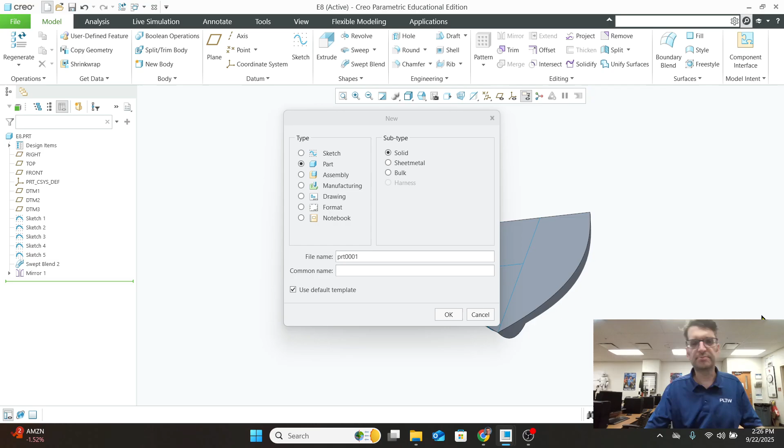There are quite a few exercises still between us and the finish line. Today we're going to get some practice with projected curves and some further practice with sweeping, so we can make something pretty interesting when it comes down to it.

And let's see here, that is... I don't even have it open yet, which is really bad. God. Let's try that again. Let me open it up.

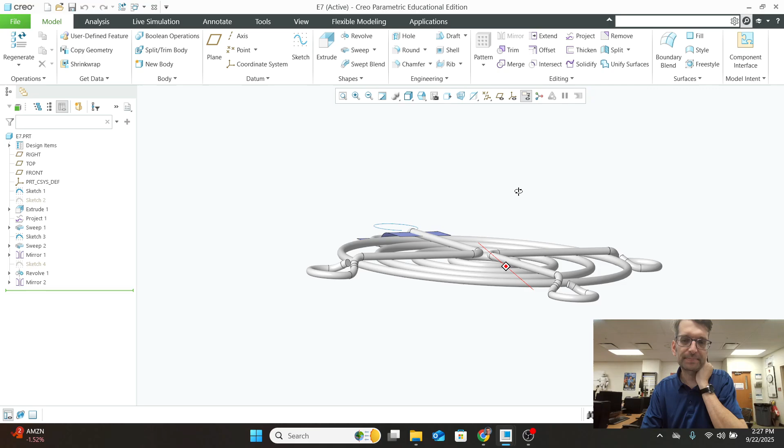This is what we are after today. So we need to make this fan grate so somebody doesn't stick their fingers into a cooling fan on the back of a PC power supply. You see this style on older power supplies, older pieces of electronic equipment.

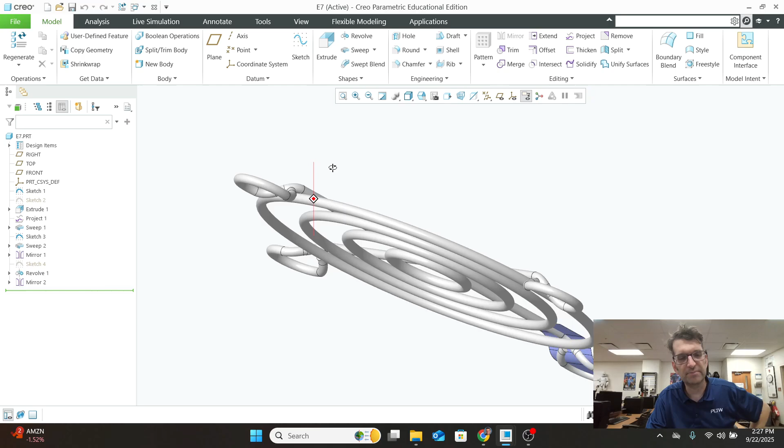But you still see some of these around. And the thing that makes it interesting, and a little bit tougher, is not because it's a sweep thing - we've done sweeps before - but we are sweeping and projecting a sweep onto a curve. So we see that the edge of this part actually has curvature to it, because this would be where a screw would pass through each of these 4 holes, and we would mount this thing to the case of a computer tower or another piece of electronic equipment. So some curvature there makes it a little bit more interesting.

And we're going to try, and the hope is that we can create this thing with a minimal amount of mess over here in our model history. So we're going to create a couple parts of this. We're going to use the mirror tool to make our life a little bit easier and hopefully get through things a little bit quicker.

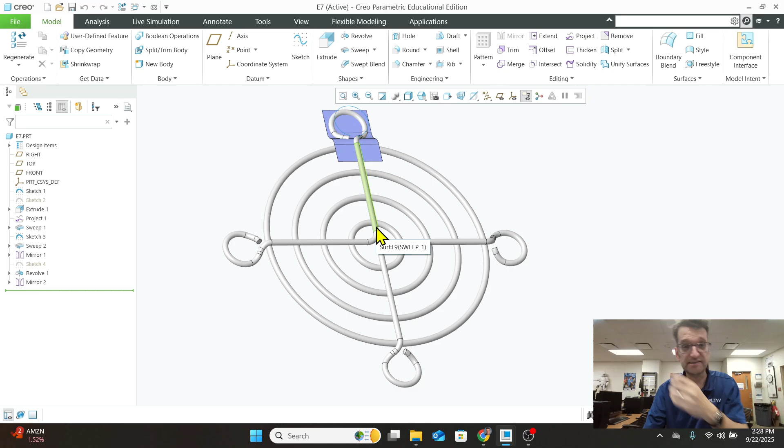All right, so first things first, we need to go ahead and start a new part file. I'm going to call this one Exercise 7, because that's what it is. I'm going to hit OK. Nope, I left a space in there - Creo doesn't like those spaces.

And here we go. So turning into your copy of the text available on vertanux1.com, and turning to page 72, we find exercise number 7. We find the somewhat older version of these instructions, because this is from a previous version of Creo.

But I think there is enough here for you to be able to get the thing done. So try, after watching this, go and try and do the thing directly from the book, using the steps shown in the book and what you've seen in the video here, to try and work through the process yourself, rather than just listening to me for 15 seconds, pausing the video, completing a step, pushing play, hearing the next thing, and repeating that until you get it done. I think you'll get a lot more out of it if you go ahead and do it that way.

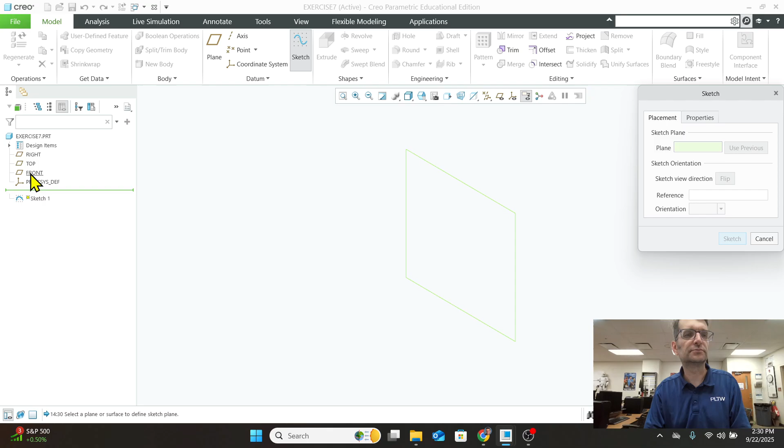All right, so we're going to start off with a sketch on the front plane. We're going to hit sketch, and I do have my planes turned off - there they are again. Let's go ahead and go to that front side view so we can see that. And we need to start drawing up this little - let me pull this up so we have this too, because we really need to have that up, that would be helpful, right?

Let's go to - and remember too, in case you have forgotten or aren't terribly sure that this exists, if you go to Vertanux1, you will also find all of Chris Sikora's videos on doing these things. And again, his are a little bit more direct. Chris is an old pro when it comes to Creo, definitely, and he'll get you there the most direct, quickest way. I'll take some side steps, go through a little bit more explanation on some stuff and how to get yourself out of trouble when you get yourself into it as a fairly new user.

And that's how I kind of approach things. So you have a point and a counterpoint on how to work through all of these things. But nonetheless, looking at here - oh, his description for things. And we'll go and find the link to his website, Vertanux1.com. I'm going to go here and grab that manual.

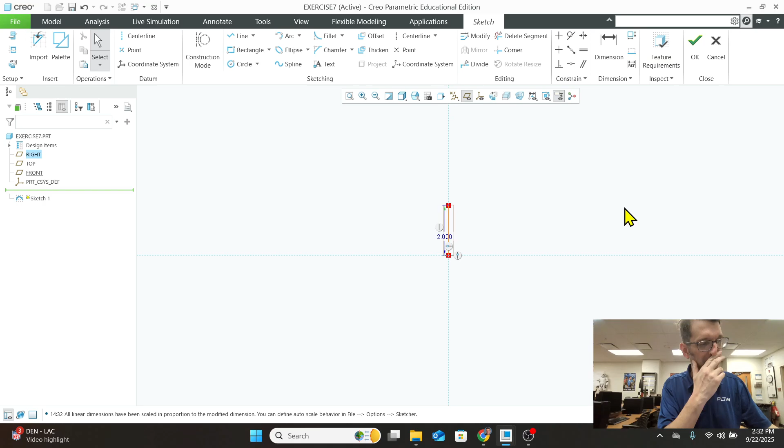So we need to add to this guy. We need to go ahead and add an arc, and we're going to do a center and ends arc. First thing we're going to do is add the center.

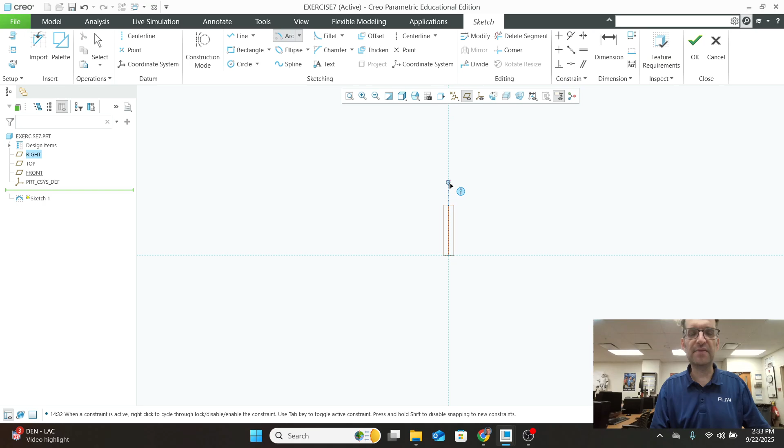We're going to put the arc out to here, touch the top of that line, left click on it once, and then work around the circle until we get something that looks about as complete as the one in the example does. Let's turn these planes off because they're just obnoxious at this point.

All right, so let's go ahead and get these things dimensioned. We need a dimension for the radius. The radius on this one needs to be 0.5 inch, a half radius.

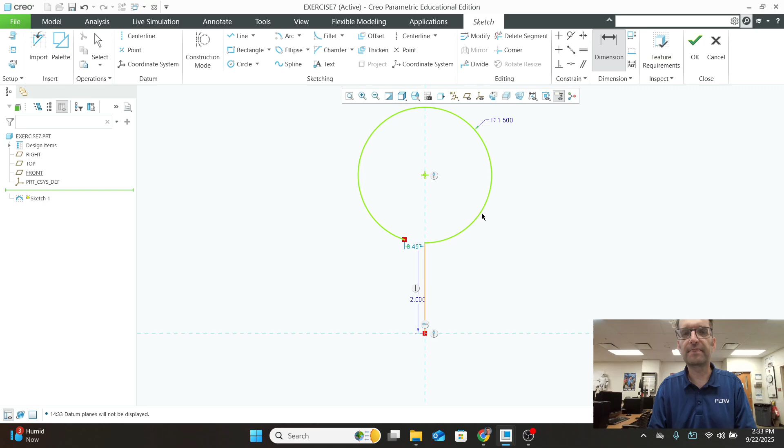Let's go ahead and set this overall height here as 4 inches from top to bottom. Let's add another dimension in for that, from there to there. I've clicked out on the side. We want to get rid of one of these dimensions because it's a conflict.

We're going to get rid of that one because it's in there as a strong one, since we set it. So we're going to delete that one out of there so that we can put one in here at 4 inches. Get that set up.

Now we need to set up and finalize this angle. Okay, so this angle from vertical is going to be 15 degrees, 15 degrees of opening from the center here to right there. Let's go ahead and get that in there.

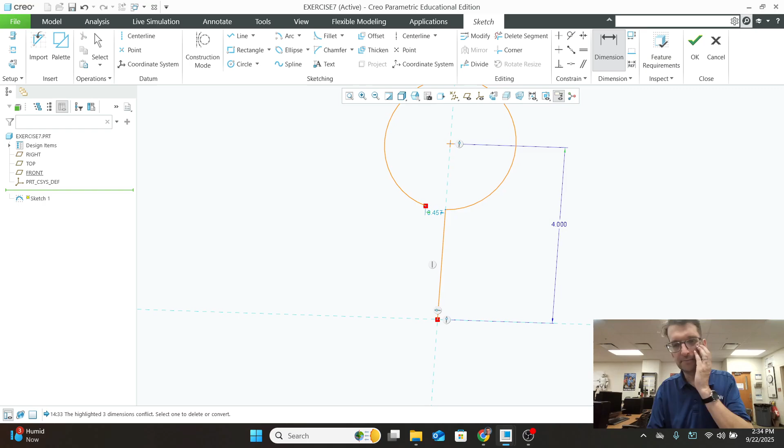I get my front view nice and squared back up again. Let's go ahead and add a center line from the center of our circle to the edge right there, and that's going to be our guide from which we can actually set up a dimension now. It pops in a dimension for us there once we do that.

Let's go ahead and override that to 15 degrees. And we need to add a radius here of 1 inch, so we're going to put a fillet

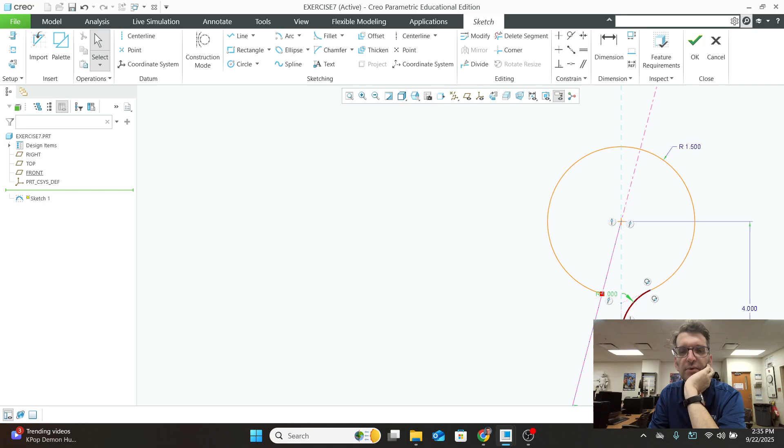from right here to right here, and that is going to be 1 inch. Set that to 1, and I think that should be what we need for that is set. All right, let's go ahead and hit OK on that one to lock that one in.

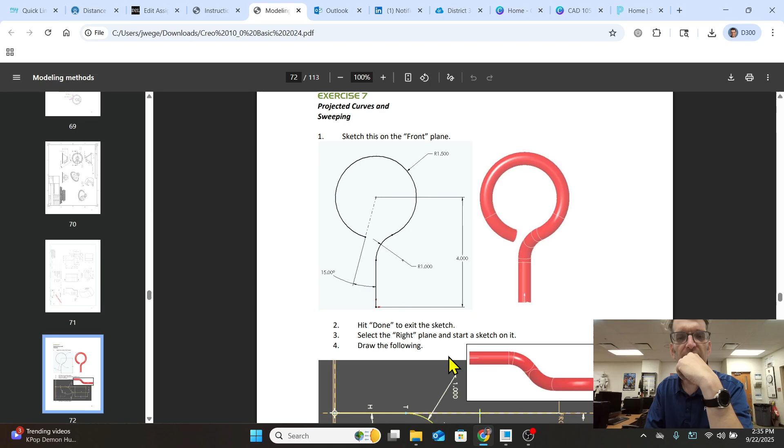And now what we're going to do is we're going to flip and go to the side of this, so we're going to go to the right side of it, to the right plane and start a sketch there. And from where this thing originates, which is right at the bottom of this line here, right down there,

we're going to start this sketch on the right side. So here is our original sketch running like this vertically. This is rotated 90 degrees, of course, so standing up, we're going to start that in the same place, and we're going to sketch how we're going to curve this thing.

So we're going to end up creating a sweep that's going to sweep along a path, which is this path here, but then we're going to put that path along this curve here. Okay, so we're kind of doing two things in one. We need two things to set this up.

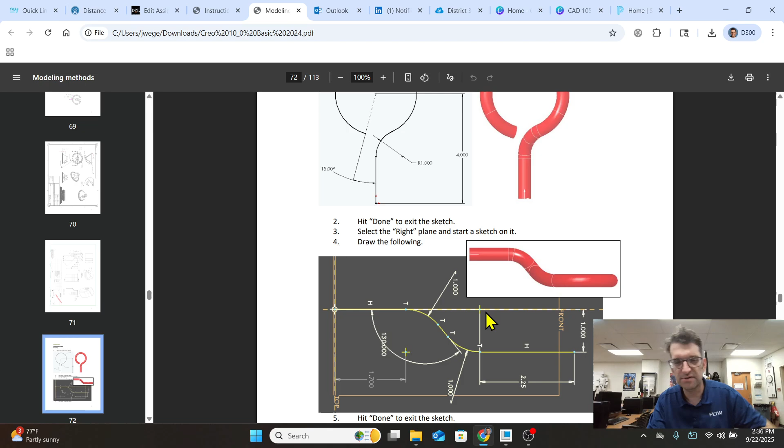Well, let's get on that second one. All right, so flip our side to the right, and we're going to start a new sketch there.

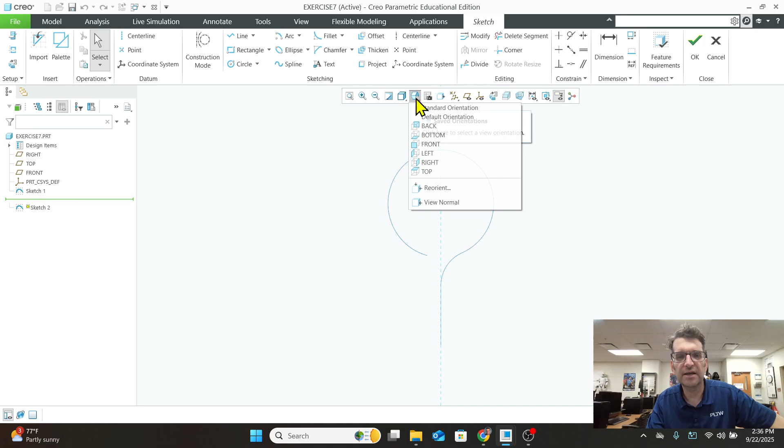Let's go over to that right side because it would be helpful to be looking at it if we're going to be sketching there, right? There we go. So we've started a sketch, it's on the right plane. We're going to go ahead and start with our line tool so that we can draw up what is shown on that right side. So let's just get it close, we're not trying to get this exact.

Remember, we're just getting it in the neighborhood, and then we're going to come back and put our dimensions in there to get things locked in.

So starting at that same origin, I'm going to come up like this. I'm not going to click on these locking points where these yellows are. I'm going to try and stay away from those things as I do this. I'm going to give myself a little bit up, and come over here like this, then go over like this, and go up something like that.

Close, but it doesn't need to be perfect yet. All right, so let's get some dimensions in here. First thing, this angle right here, according to our drawing, is 130 degrees.

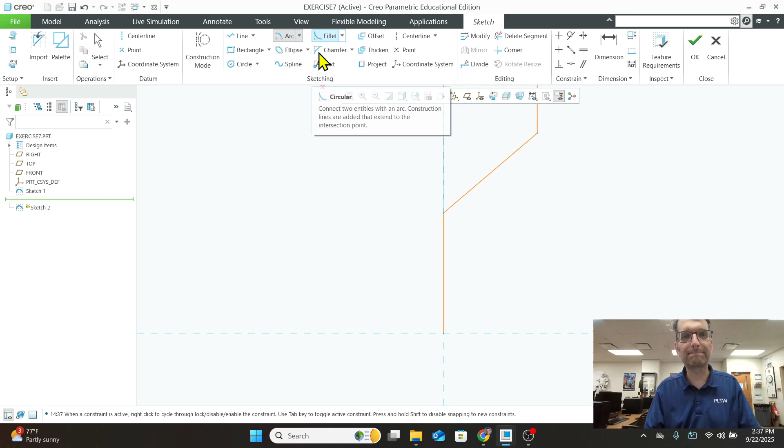We have a couple of radii on the corner here, some fillets. Let's go ahead and get those fillets. Let's set this first one here. Radius is set at 1 on there. Set that at 1. Let's add another one right here.

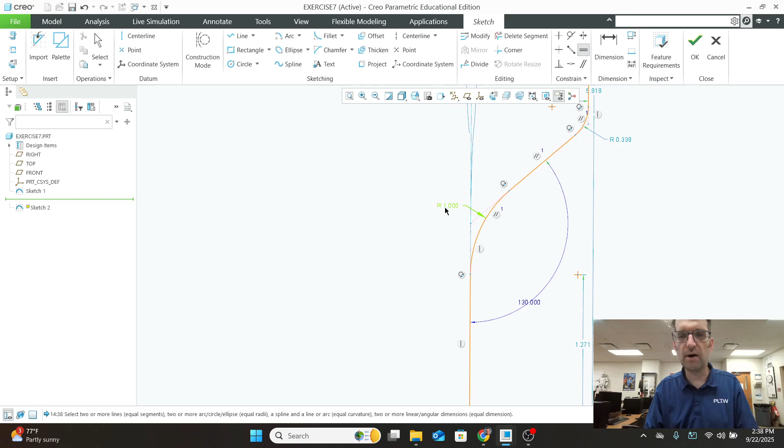So back into that fillet tool, and then we click here, we click here, and we have that radius set at 0.339, but let's be tricky here. Let's hit the equals constraint, and then we click the one that we want it to be equal to, which is 1 inch. So now those two are locked together with this single dimension of 1 inch.

All right, next we have this distance from this line to there, which is set at 1 inch, which I accidentally just hit as an equals there, which kind of works, but let's go ahead and delete that dimension. So now we got it in as 1 inch there.

That is good. Let's look at it the way that we want to look at it so it makes a little bit more sense, and look at it from the right side so that we can see that. And we need to set the overall height in 2 places here, or 3 places.

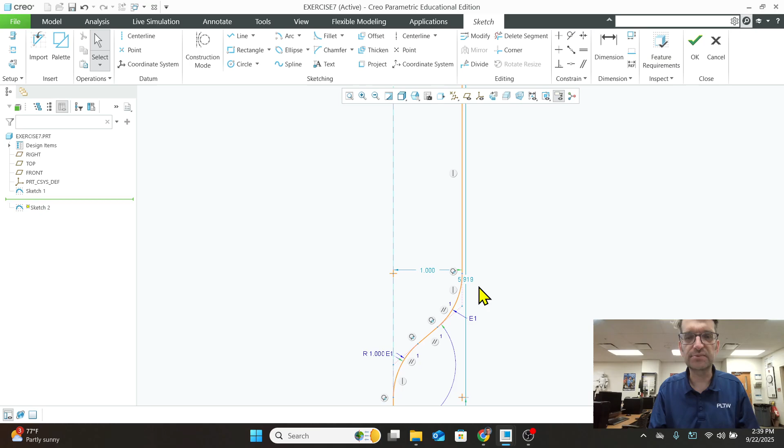Let's set the first one. So we need to put a dimension in from the top here to this point here where that curve ends. And that's going to be 2 1/4 inches tall.

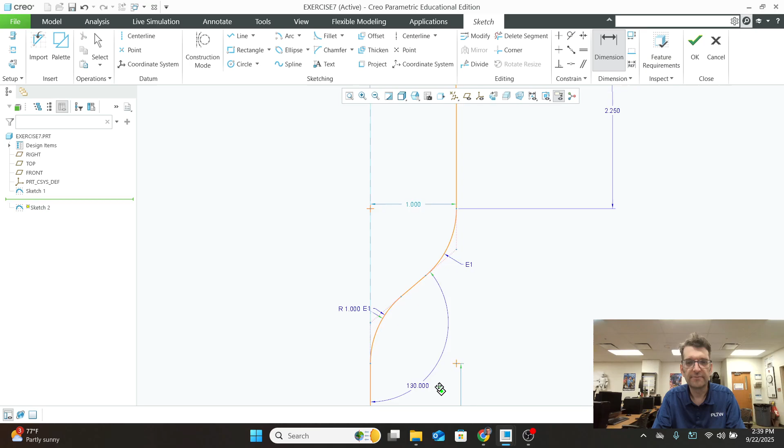We need to set another one, our other height here, which is going to be from the center of this arc, so the center point of that arc to the bottom, so is 1.7. So we have a dimension there for that already. Let's get that one in there. And now we have that set.

We have our 130 degrees. We have a radius of 1 there and there, distance of 1 inch, 2 1/4 there, 1.7 there, and we have everything that we need on that sketch on the side there.

All right, so we're going to go ahead and hit OK on that one. And now we kind of see what we got going on here. We've got our original sketch to show the hook, that round section. We have this one on the right side there, perpendicular to that, that's going to help us set the curve for that. All right, so we need to extrude this curve.

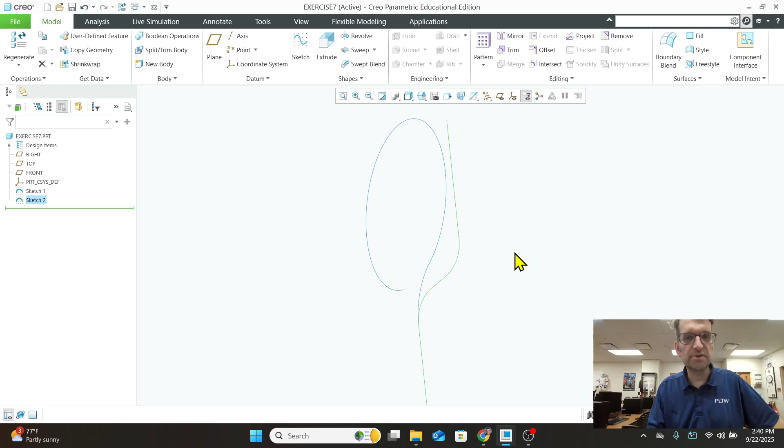So we're going to extrude, and it's going to extrude that curve for us. It's only going in one direction, though, so let's change that. You could flip back and forth that way, remember. Or we go to symmetric, and we're going to set that distance to 4.

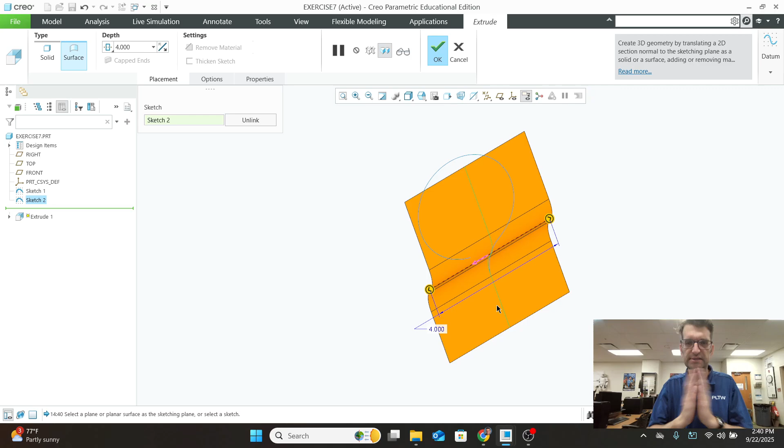So the overall distance is 4 inches, and we're going to put that from which it's being extruded, which is that line there, in the middle there, dead center of that 4 inches. Then we're going to go to OK to lock that one in.

Now we need to go ahead and project. And we're going to project this first piece of geometry that we created onto this curved plane. Not a curved plane, but a curved, essentially surface. All right, so let's do that.

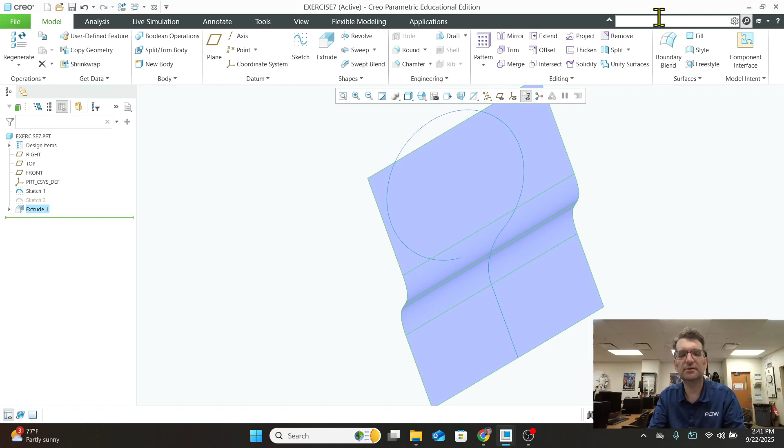So remember we can cheat here. If we don't see a tool, really easy, we can always type it in up here. And then in that search and click on it, and it brings you right into it.

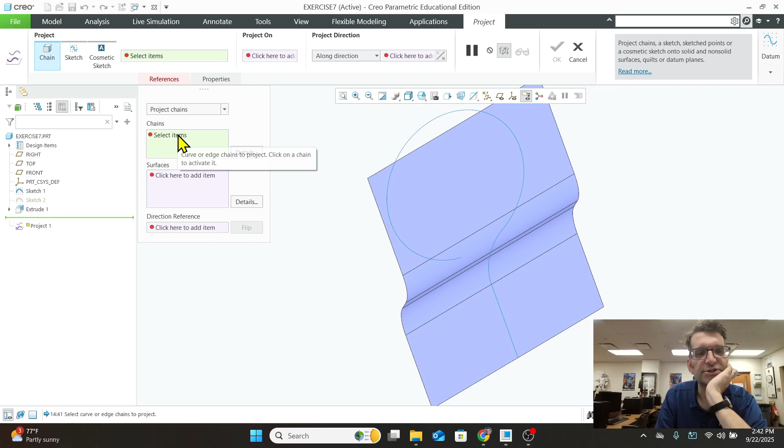All right, so we need to pick our chains when we're doing that. So what we're going to do is we're going to pick the chains first, which is going to be that, right? And the surface, we're going to go ahead and pick that, which is going to be all these things. We need to pick all these selections. So we're going to click on the first one, hold down Control, and get all of the other segments of that, move it around, make sure you get all of them.

And then our direction reference, we're going to pick a direction on there too, which is going to be one of these surfaces. So if we pick one of the surfaces, we see that we have our line projected here, but we want to flip this arrow around, because if we don't, when this gets projected onto this surface here, we're going to lose this first leg of things, and we don't want to do that. So let's flip the arrow so it's facing down. And then we're going to hit OK.

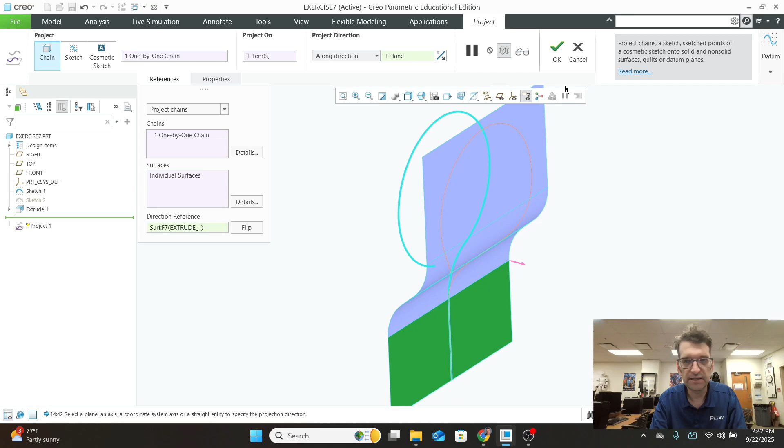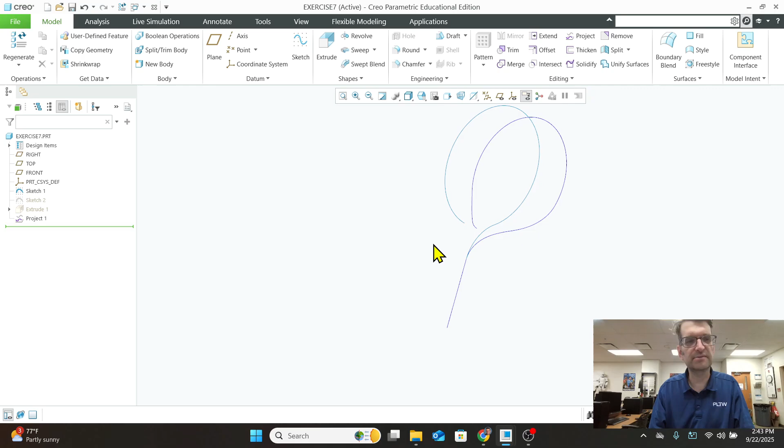And then when we're done with that, we should have that line projected onto there. Okay, so let's go and hide these things. This extrusion, let's hide that. So if we right-click on extrude and click on hide, that's going to disappear. And then if we click on this guy, which is sketch 1, right, and we hide that one, then it's gone. And if we look around now we have that curvy sketch, which is going to allow us to make this portion of things. Okay.

So if you're good so far, you're going to be good the rest of the way, because that is the roughest part of things to get down, is getting those steps in order.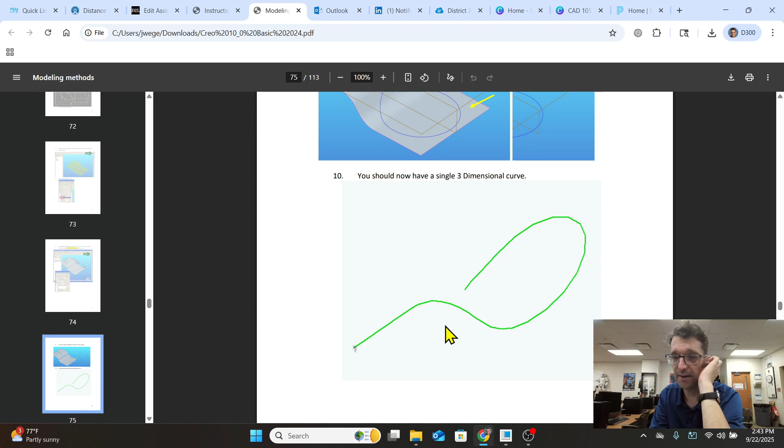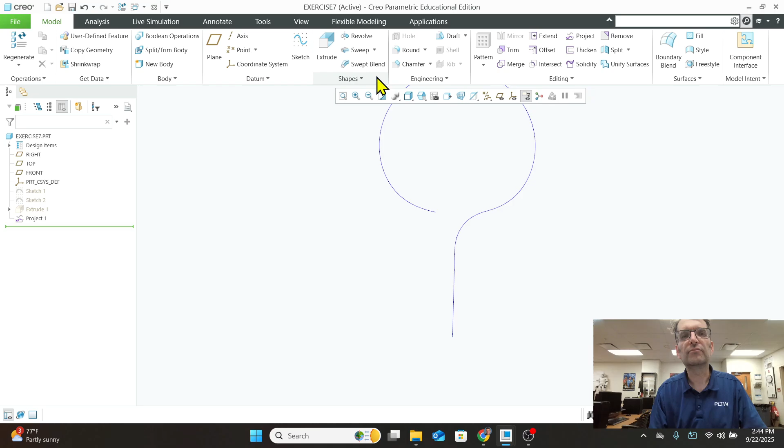Okay, all right, so let's go to the part where we need to go ahead and project this thing. So what we're going to do is we're going to do a sweep blend. Sweep protrusion.

No, is that right? No, I don't think so. Let's just go to sweep. So we're just going to go to sweep.

We're going to click on this thing, and we want this purple arrow to be on this end. If you happen to get on there and it's down over here, click on that purple arrow and flip it over here. Again, we started in sweep to get into this, because we're going to start and draw our little sketch, our profile, our circle down on this end, and we're going to sweep that along over there.

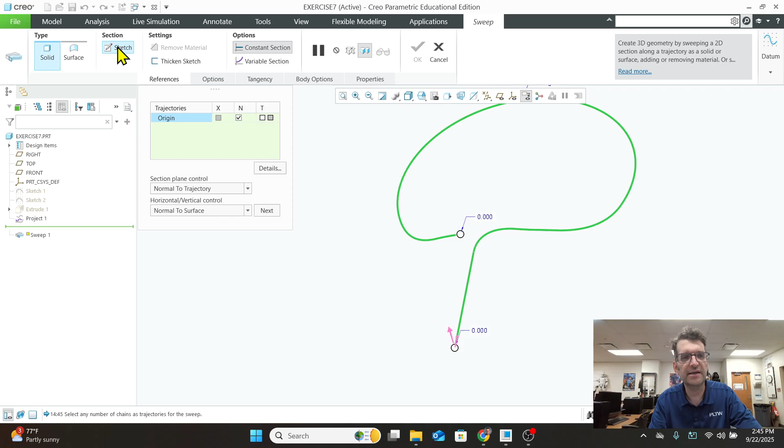All right, so let's go and find where we put our sketch in, right? It's going to be right here. So we type in sketch, and we're going to come down here and we're going to sketch right there. So let's do a circle, and we're just going to set that circle. Double center click so we can set the diameter of it, which is going to be a half inch, right? Half inch, 0.5.

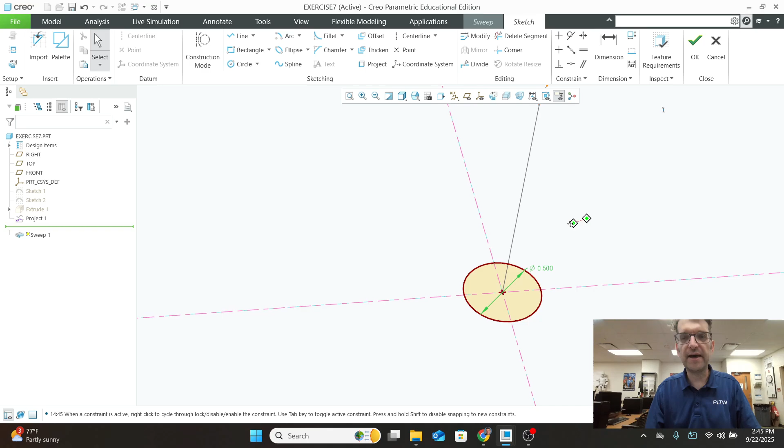Okay, got that, so we got that. That's there, we have our sketch identified. We have that selected. We're going to hit OK to the sketch. And there we go. So it ran that sketch down along that path, and we have our first part of things. So we're going to hit OK.

We are doing pretty good. All right, so let's reset our view so we can see that front view nice and square.

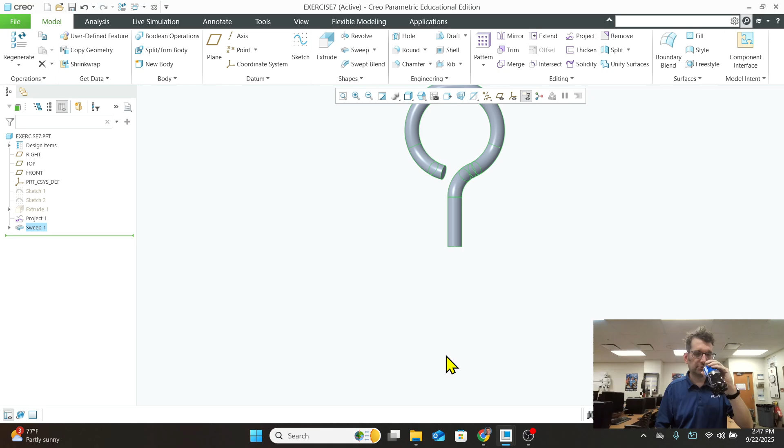And we're going to go ahead and create another sketch that we see on page 77. So we're going to extend this leg a little bit, and we're going to create the first little bit of this thing so that we can create half of part of this grate, and then we're going to mirror it along a 45-degree angle so that we have half of it, and then we're going to create another sketch for the circular parts of the grid on there, and then we're going to revolve that thing, and we're going to mirror it, and we're going to be done.

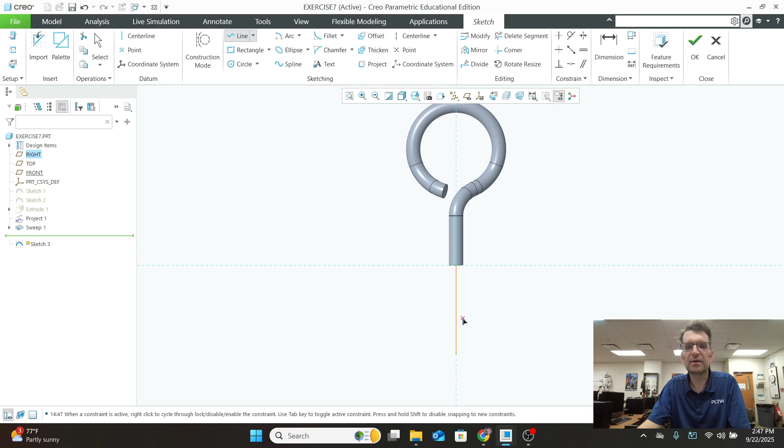All right, so new sketch. It's going to be on the front plane. Okay, let's get in here. Let's go Line tool, we're going to start right there, we're going to come down. We want that to be exactly 7 inches long.

I know some of you might be thinking at this point, like, why in the hell are we doing this so big? This would be a really big power supply. Yep, you're right, but the intention here was just to have dimensions that kind of made sense here.

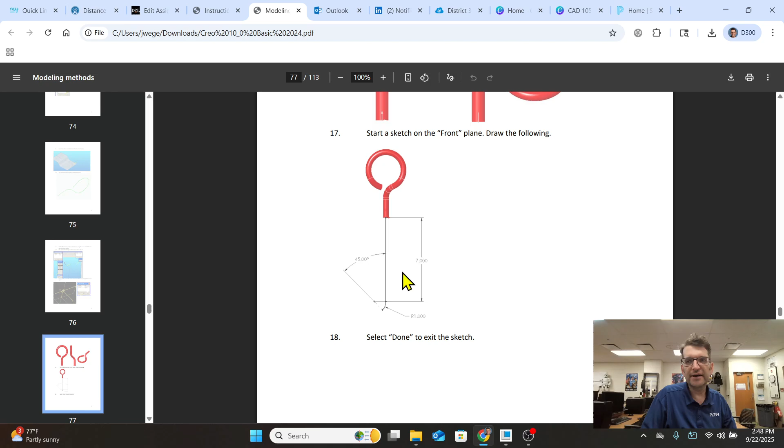Okay, all right, so we got that part done, we got that line in there. We need to put a little curve on here. So if we look at this sketch right here, and we zoom in a little bit, we need to have this little leg here that has a radius of 1.

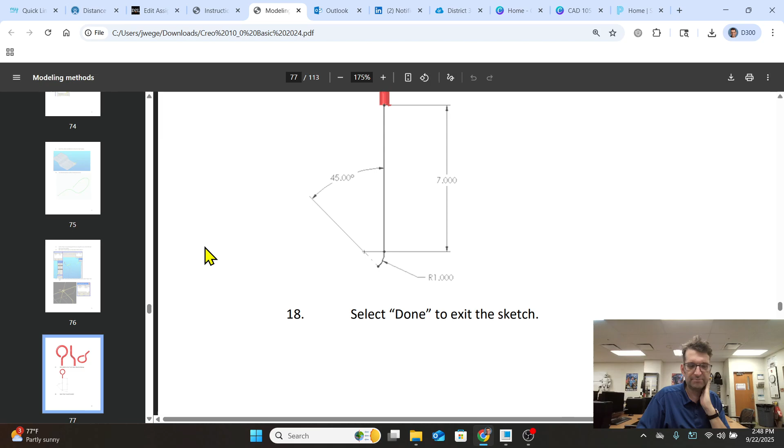Okay, and then it has a 45-degree angle on here. So we want a 45 between here and here. So that way, when we're done with this and we go ahead and sweep that guy, we can mirror along this 45-degree line, and then we get that 90-degree portion of the hook.

All right, we've got to get this little part made in here. So let's do that. Come down here.

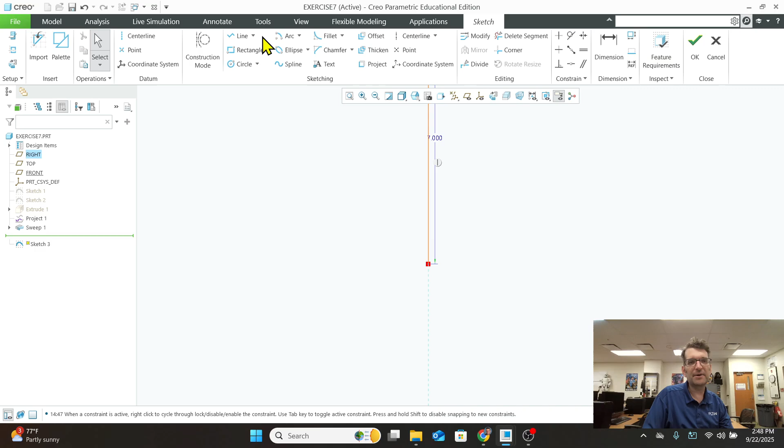We know that has a radius of 1. There's a couple different ways to do this. I'm going to use the same arc that we did before, the 3-point, center and ends arc. So let's do that. But I'm going to put a little construction line in here for myself real quick.

I'm going to put that right here, and I'm going to put that out, and that's going to be 1 inch long, because my radius is 1 inch long. I'm just doing this as a guide.

And then I'm going to go back into my arc, and I'm going to pick the center, pick the outside of that. But then look, oh, I went the wrong way. So let's try that again.

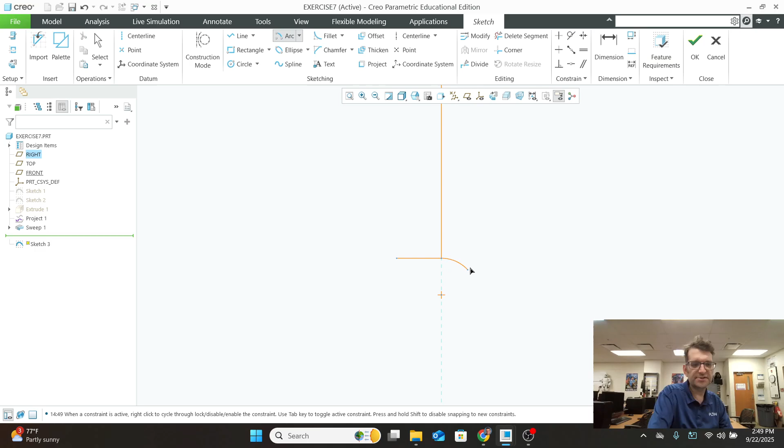Let's start that arc. Let's put the center right here this time, though. And let's draw that. Does that work? No, we want it to start right here. Okay, so that didn't work. Let's try one more time.

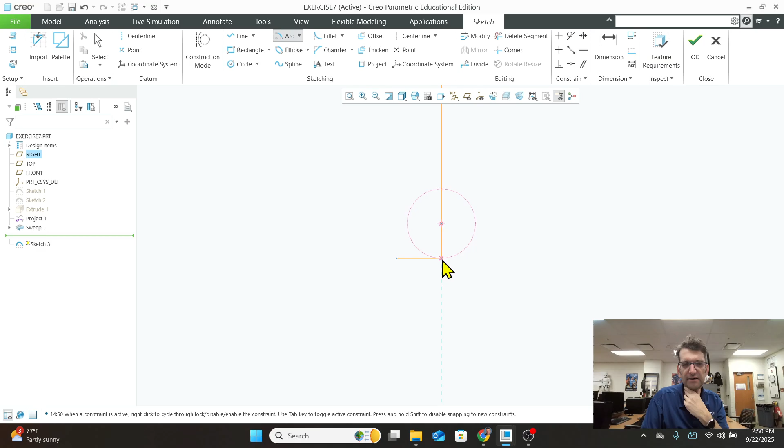I'll go like this, come down here. Is that right? No, because I want that to go from here. Wait a minute. Okay, we're almost there. Running out of options here.

That looks better. Come around like this. Set it so it's close to 45. Don't let it snap anywhere. Okay, set that in there.

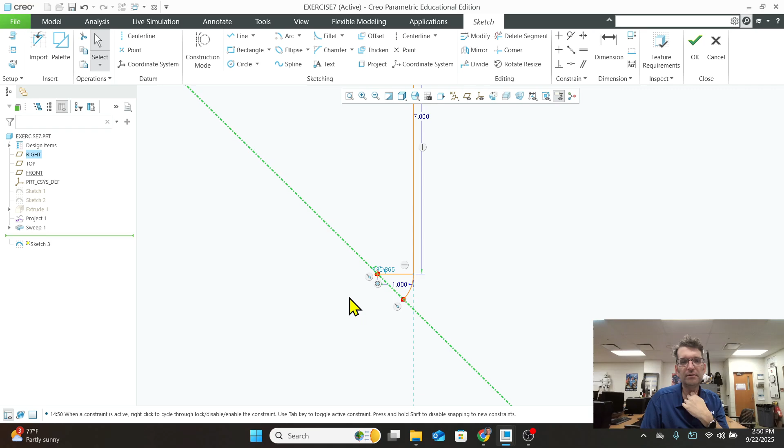And let's put a construction line in there, a center line, from here to there. Lock that in. Now we can put a dimension from here to here. Middle click there. 45 degrees. Now we got that nice and perfect.

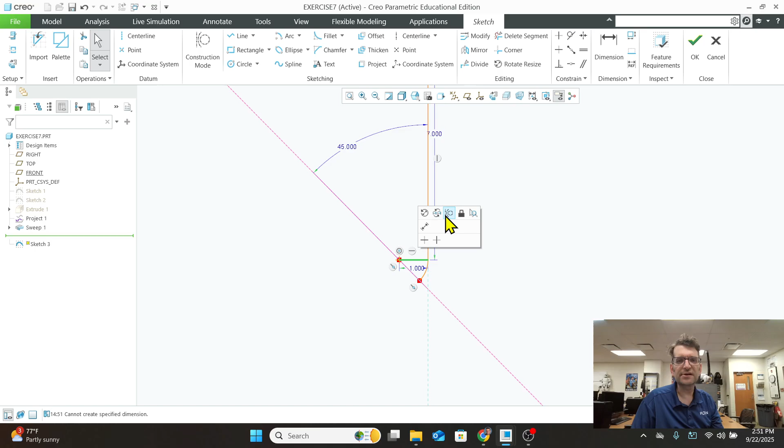Let's go ahead and get rid of that line because we really don't need it, right? I'm just going to turn it into a construction line so it doesn't mess anything up. And now we have what we want there. Okay, I'm going to hit OK.

As I come back down here, I see that I have that little sketch. So we're going to go ahead and sweep again. Now you have some choices here, and depending on what version of Creo you're running, sometimes it's going to be easy. We could just project this geometry here to create the sketch, and then sweep that along here. But I'm going to be a little bit lazier here.

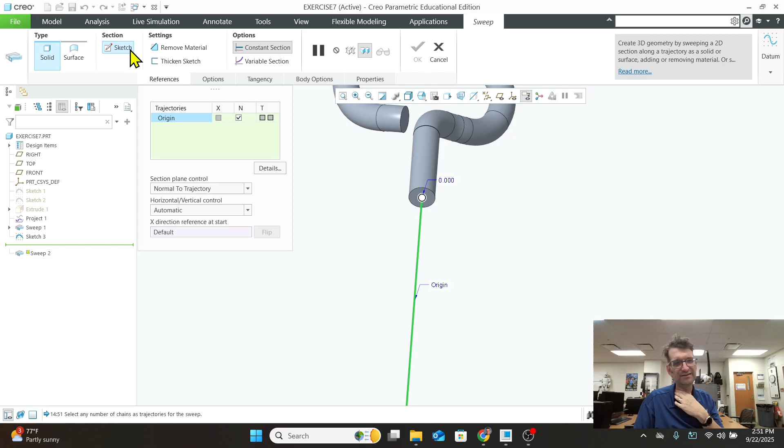Let's go to the Sweep Tool, because I like things that work the first time and work with as many things as possible. So I'm going to start the Sweep Tool, go to Sketch, and then draw the sketch. But where am I going to draw it at? That's not where I want it to be.

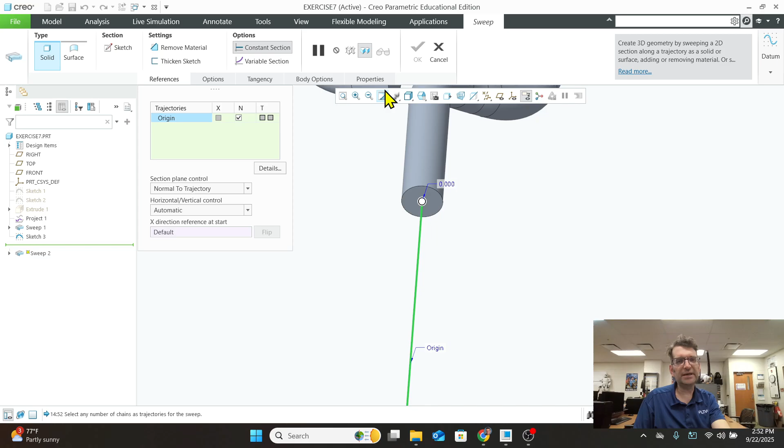Let's see, let's try that again. Let's cancel that with the sketcher. So where is that sketch going to be? Let's cancel that Sweep Tool.

Let's go ahead and just sketch that guy right on there. Let's go ahead and sketch that circle right on there so that it locks to the other one, so we have the same diameter. Have that sketch in there, and then let's go ahead and hit OK.

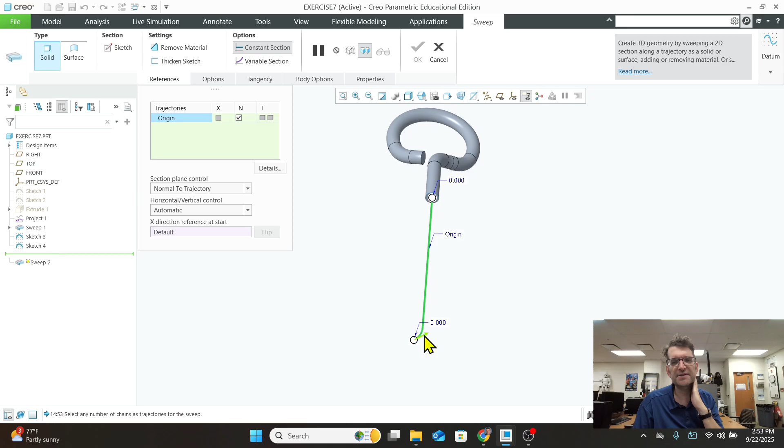Let's go to the sweep. Okay, we've got to make sure that we get this on the right side, right? So we need that arrow right there because that's where our sketch is, and we're going to go from there.

Okay, so now we're in there. Now we're going to do that sketch. We're going to put it centered right there, let it snap till it's even with that one, and then we're going to hit OK.

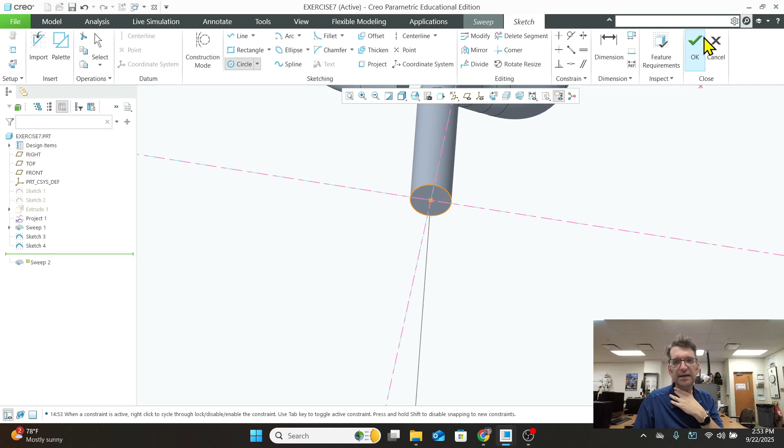And look at that. Just like that, we've got half of this whole thing. So if we look back at this one, what we've got now is like this right here, all the way down to right here.

So now we're going to mirror this thing across that face to give us the other side. Remember, we don't want to have 10,000 objects cluttering up this model tree here, okay?

As quick as you can get to it, as efficiently as you can get it done, get things done that way. So let's go here, it's faster, right? Generally speaking, if you work through this stuff faster and complete it accurately and quickly, you're going to be better paid, more employable, and move up through the ranks pretty quickly if you can do those things.

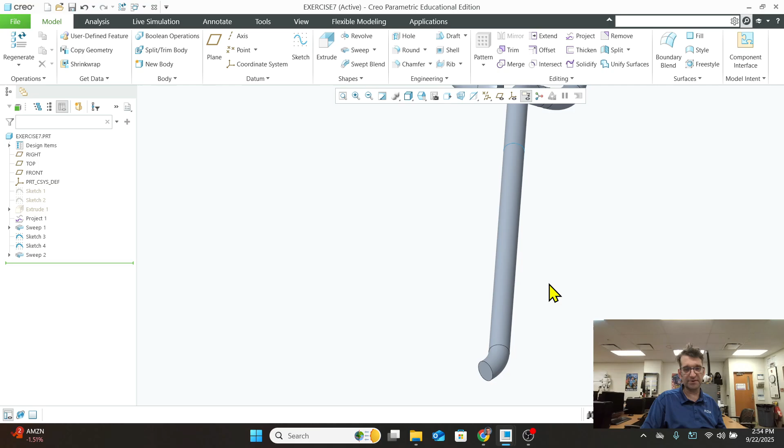All right, so we're going to go ahead and mirror this stuff that we've already created. Let's go ahead and select the parts of that. Let's see, let's project. We have this right here, the sweep is part of it there, and then our second sweep, we've got to get both of those, right?

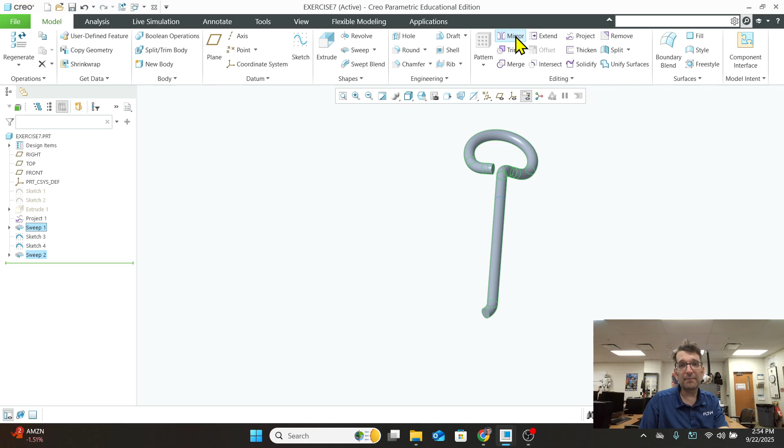Okay, so we have both of those selected. We're going to mirror now, and it has both of those selected, both of those parts. Select the mirror plane, it's going to be that face right there. And if you got both of those sweeps that we created, this little one here and this larger one up here, the original one, you're going to have that just like that.

We're almost there. All right, let's go back and get this at a front view, and let's go ahead and rotate over to the right, so we're looking at it from the side.

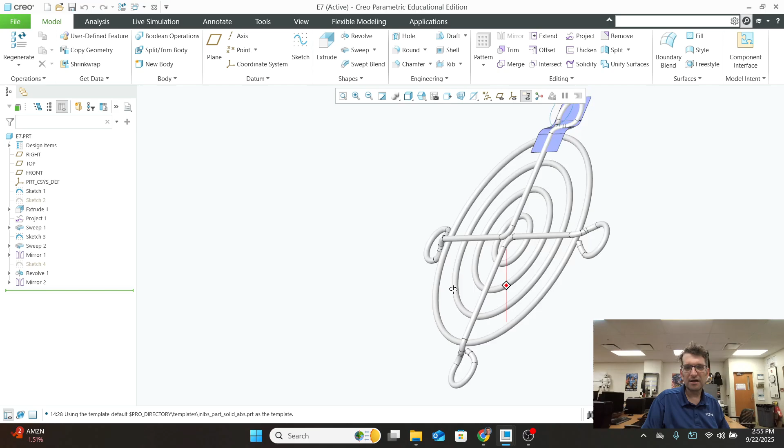Now we're going to go ahead and create the sketches on the side for all four of these: 1, 2, 3, and 4. We're going to sketch those on the side of this thing connected to that, and then we're going to revolve that thing all the way around.

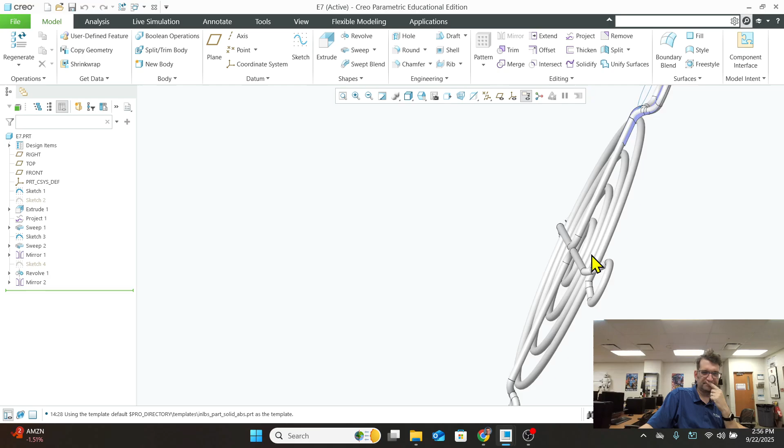Okay. Sounds worse than it is. Just trying to walk you through the process here.

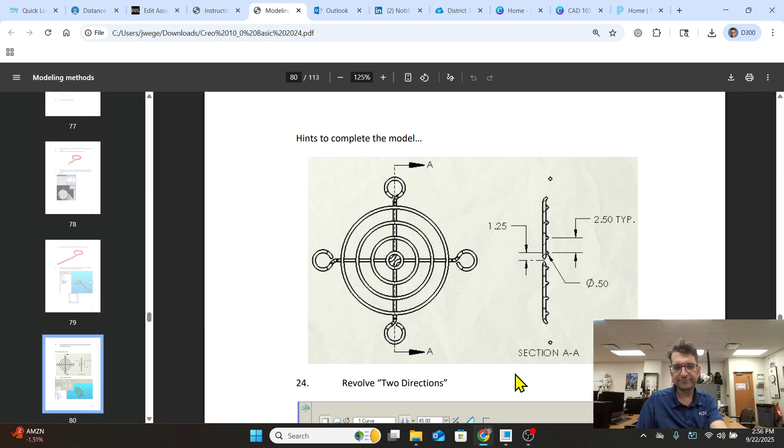All right, so let's go and sketch that out. So let's look here. And let's just kind of get it put on there, and let's make sure we're looking at this the right way.

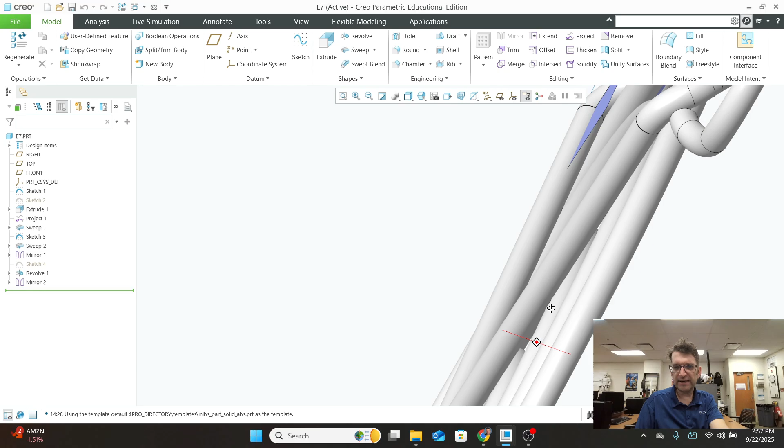So we want the grate on the top of this, right? We want the grate on the inside of this, on the bottom. Okay, so let's make sure we're looking at the right way we want to be looking at this thing. So let's look at this. So we want our circles to be on this side. So let's just sketch out some circles.

We're going to create a new sketch, and our plane is going to be the right plane, right? And we're going to start with the circle tool, and we're going to come in.

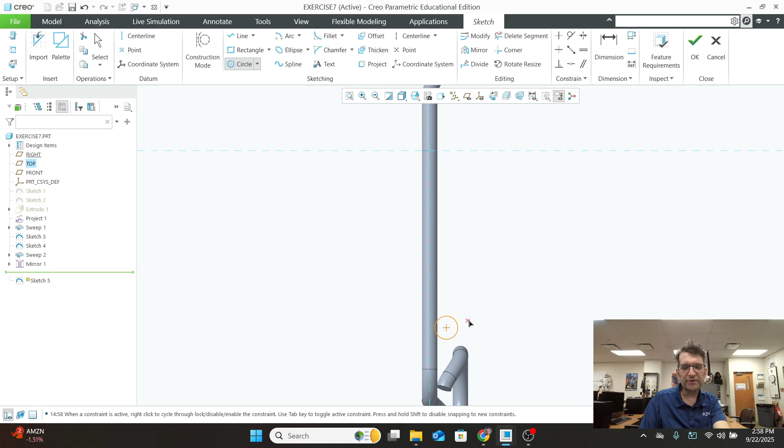And when we sketch this in, we want to do a little bit off to the side, and we want it to be... left click, set it, set the dimension. It's going to be a ½ inch in diameter. So 0.5 in diameter, and remember that we want this to intersect with this body.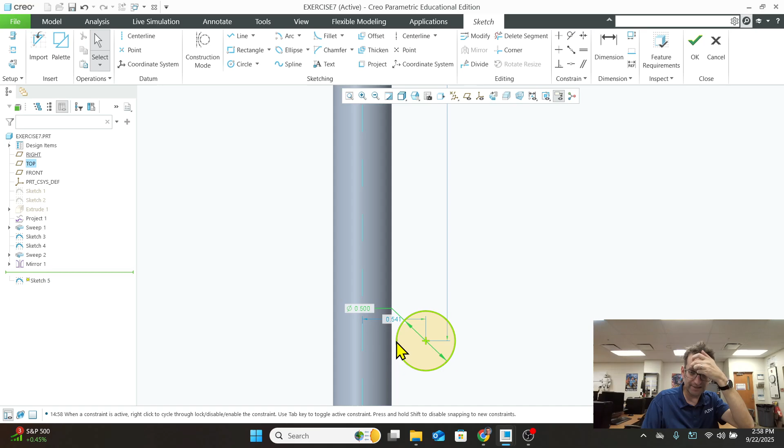Just a little bit of overlap, because some versions of Creo, some of the older ones, if you happen to have another one, if there is zero contact between those or just a tangent point of contact, sometimes it has some issues with that, so you don't want to run into that.

So let's go ahead and set that and get that distance from here to here a little bit farther over. If we do it at, let's see here, 0.5, we're right on, right? We're stuck right on there. Let's go in a little bit farther than that.

So 0.49. Now we have a little bit of overlap. See that little bit of crossover there, so that they're going to intersect with each other when we create that. So there's one. Okay, let's go ahead and get that one in there.

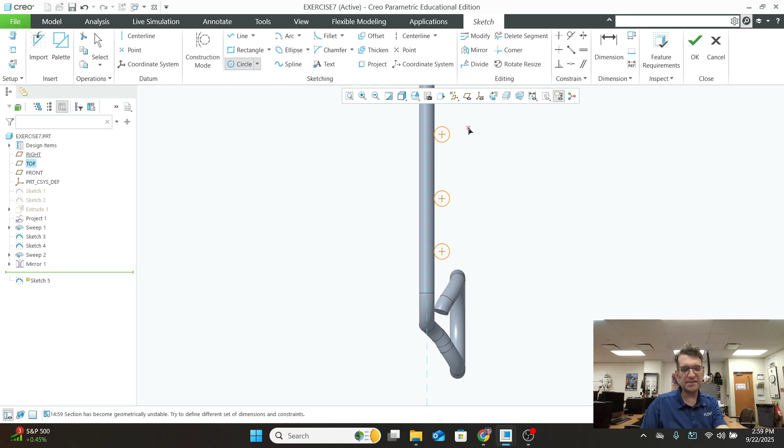Let's do another circle. Let's get the center to be the same. Let's go until it snaps to be equal. Do that one. We need 4 of these in total, right? Don't worry, we're going to go and sketch to get these things spaced like they're supposed to be after the fact.

All right, so let's get some dimensions in there now and fix some of these dimensions that are in here. So let's get one here. So from here to the center is supposed to be 1.25 on the first one.

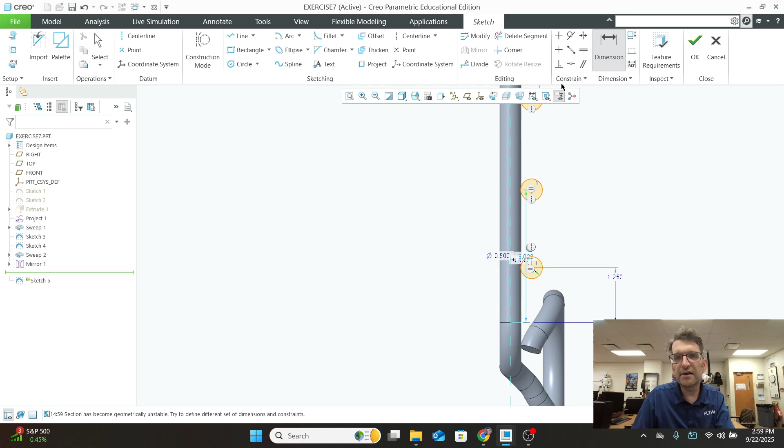And then all subsequent ones, center to center, are going to be 2.5, 2.5 on that one. And we're going to go center to center here, center to center, off to the right, center click, 2.5.

And the last one here, set that distance, center to center, up, center to center. There we go, 2.5. There we go, we have all of those set up.

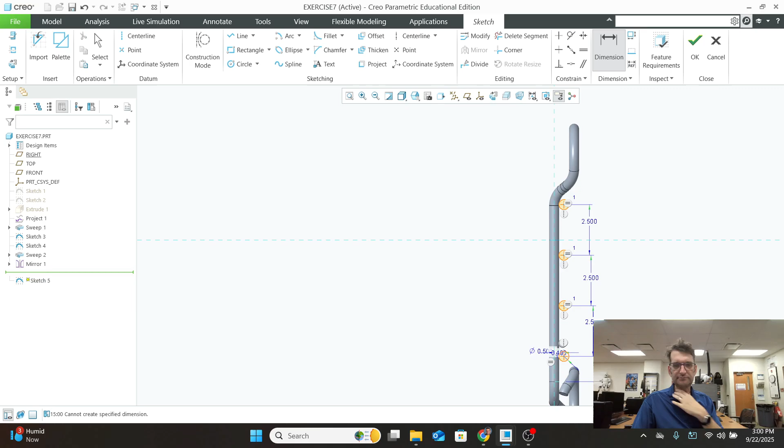Very nice. We need to do one more thing though, because we're going to want to revolve those, right? So before we go to revolve that, we're going to want to put some kind of a center around which for us to go ahead and revolve. So if we move around a little bit, at the end of the day, the center point of this thing right here, somewhere in the middle of this, is going to become the center around which we're going to revolve everything. So let's just try and set that up here.

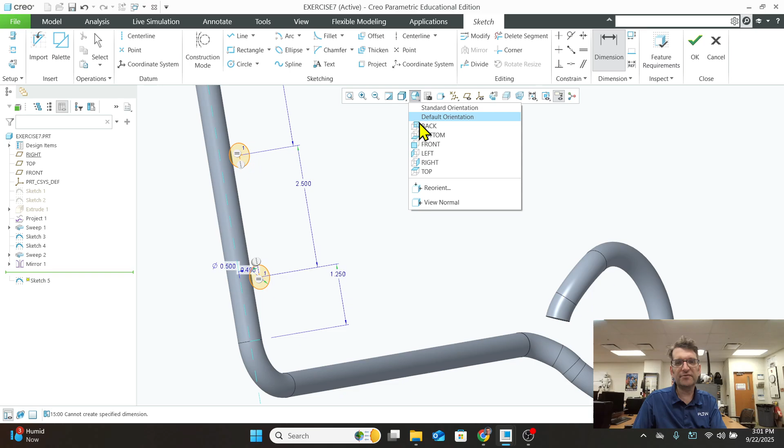Let's look back at the right side view again. And let's go in here and let's do a center line. And let's find the center of that circle. It's the end of the day here, so gotta love it.

All right, here we go. So center line, we're gonna click on this point. We're gonna come straight over and get that one. And we're gonna have that center there. And that's going to be our axis around which we revolve these four. Okay, so let's hit OK.

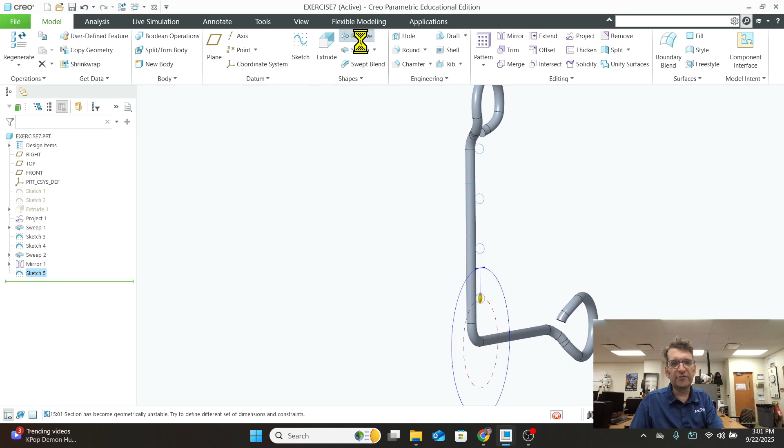Let's come in and let's go revolve. And see, look at that, automatically, because we had that axis and we had that sketch there, it's going to go, hey buddy, that's the one you want to do. And that's the case, it is the one that we want to do, with a caveat here.

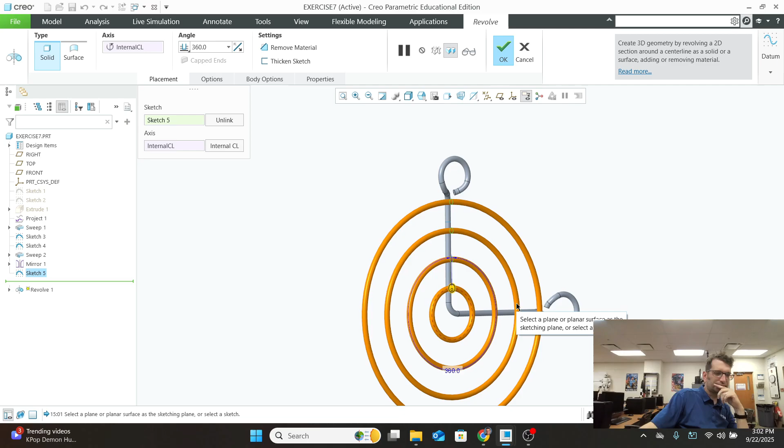So we don't want to revolve this thing around 360 degrees. We want to get 180 of this thing so that we can finish one half of this and then mirror the whole thing over to the other side. So looking at those directions there real quick.

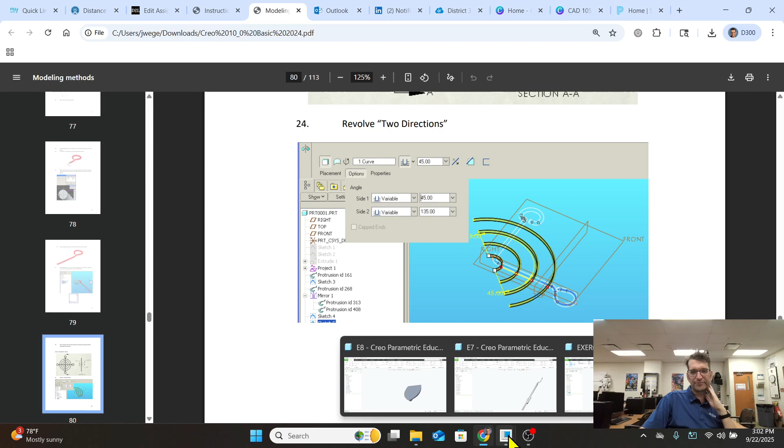When we look at this, we see that we're going to change this revolve. We're going to do it a two-direction revolve. And on one side, we're going to go 45 degrees, and the other side we're going to go 135. So let's look at that, and let's go ahead in here and change that.

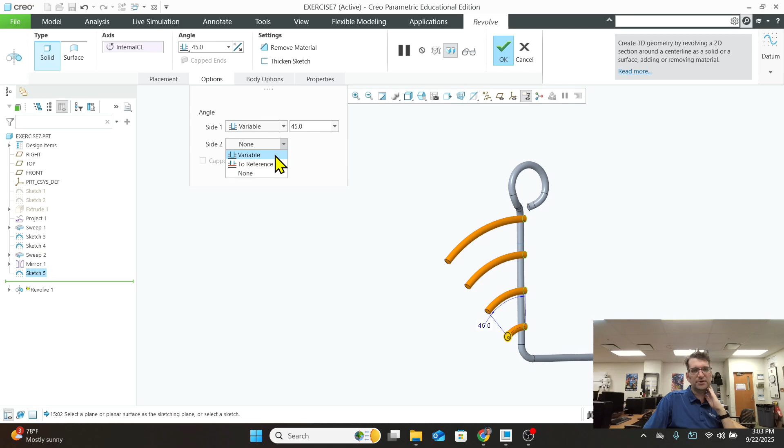So we're going to go variable. I'm going to go to our options for variable. Our first one is going to be 45. And then after we put that first 45, the second one, we're going to choose variable for that one. And to get half of our half circle, in other words, we need 180 degrees. We have 45 already, so we're going to do 180 minus the 45 we did on the other side, and hit enter. That gives us the 135.

So we're going to lock that in, and we have half of it done. Okay? And look at our history here too, our model tree is not a giant disaster. It's not a giant mess.

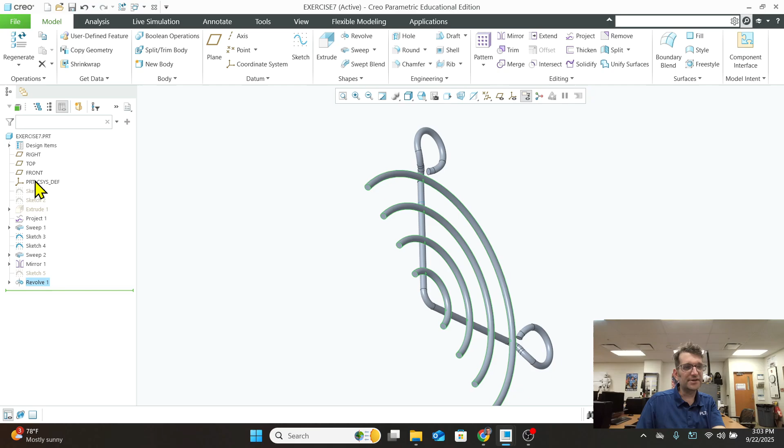All right, so now last thing, we need to mirror all this. So let's go in and find all the parts of this. So I have this sweep, and I'm going to control click so I grab this next portion of the sweep there.

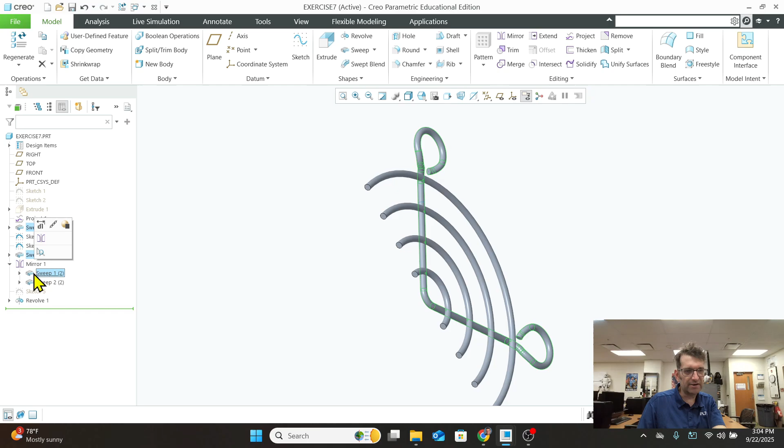I want to go into the mirror. And instead of clicking on the mirror, which would give me both parts of those sweeps that are part of that mirror, I'm just going to open up the mirror so that I can go in and grab those things, holding down control, grab those next two. So I got 4 parts. And the last thing is I got to go to the revolve and grab that too, so I have all parts. I need 5 different things selected here.

Then I'm going to go to mirror. I have all 5 selected in here. I'm going to pick the mirror plane, could be the face on any one of these. I'm going to click on it and hope for the best. And what do you know, I got the thing. I got the whole thing.

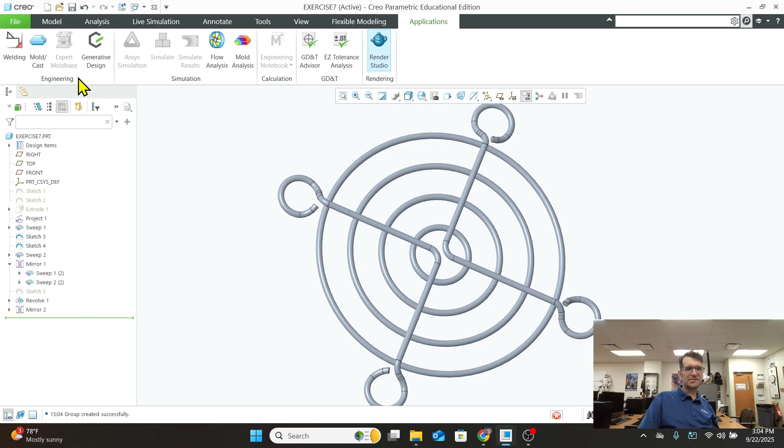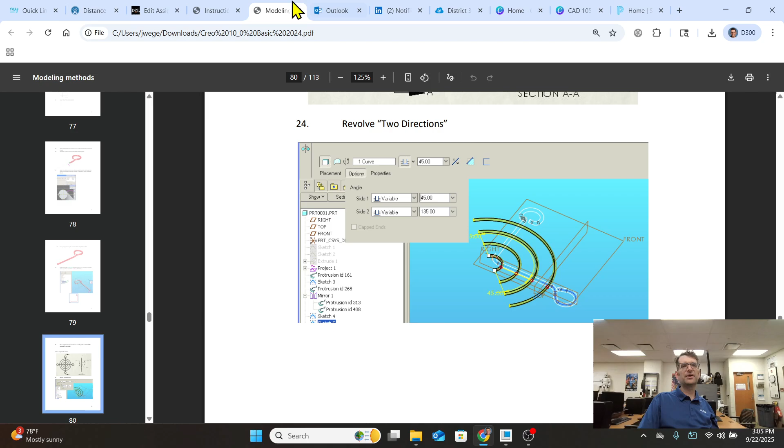It looks pretty, it looks lovely. If I want to make it look nicer, I could go in here and I could go into Render Studio and grab all my parts, finish up, pick up a nice environment to throw it into, make it into a shiny finish on there and do all that other good stuff. And then at the end of it, I'll end up with something that probably looks just like the card for the video.